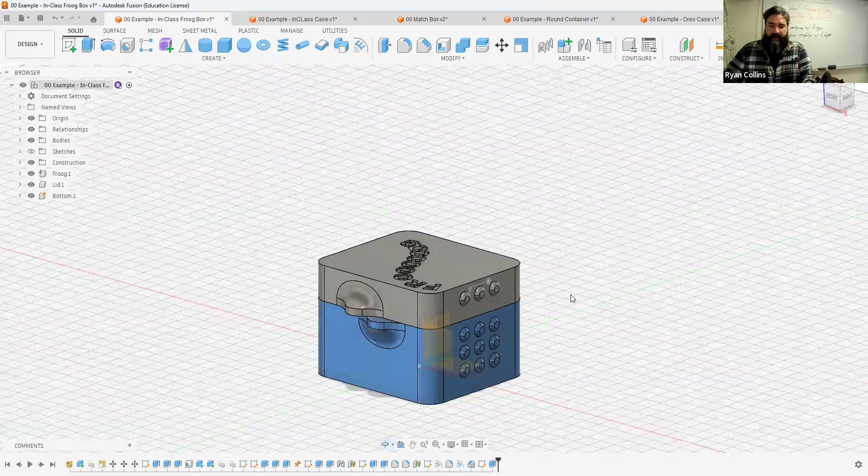All right, so we went over our simple container, something that has multiple components, which is now really explicit when we start a new project. As opposed to them just being single objects, these are different components because we can apply a joint tool to click and drag and open and close. This model was using an imported model.

We are going instead to make something that has a semblance of an Oreo, and it's a convenient little pocket case to hold two Oreos. Again, I'm just entertained by that. So let's actually get a start on something simple.

We're going to start a new design, and this is one of the new things Fusion has done. The default, or at least the first one, is part design. Part would be individual parts. An assembly would be importing all of those parts into one project and making them all interact somehow. We're going to skip right over that and use the hybrid design, which is the default layout for Fusion prior to this most recent update.

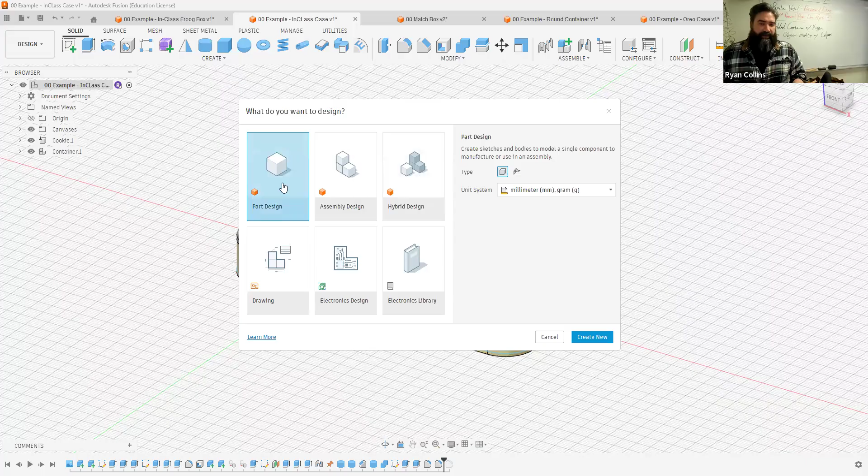So if you forget, it's not a big deal. I'll start a new project in the part design just to show you. If you need to change measurements, mouse over to the left on the project tree, mouse down to units. You would say units if you wanted to change from millimeters to inches or anything else like that. I don't, but just showing you.

But the new one is part design. Mouse over the word part design, and the little pencil symbol shows up. Left click on that. Toolbox pops up on the other side of the screen, and that allows you to select hybrid. Convert brings in a few extra tools to the toolbar that aren't on individual projects, like assemble, new components, stuff like that. And one of the main ones we're going to be using tonight is new component.

A component contains everything. So by default, say like any of the projects we've had so far, you will have your whole project. Let's say there's your project tree, and then until we say something, yeah, I had to remember how to spell untitled. It'd say that, and then below you'd have your bodies, sketches, whatever.

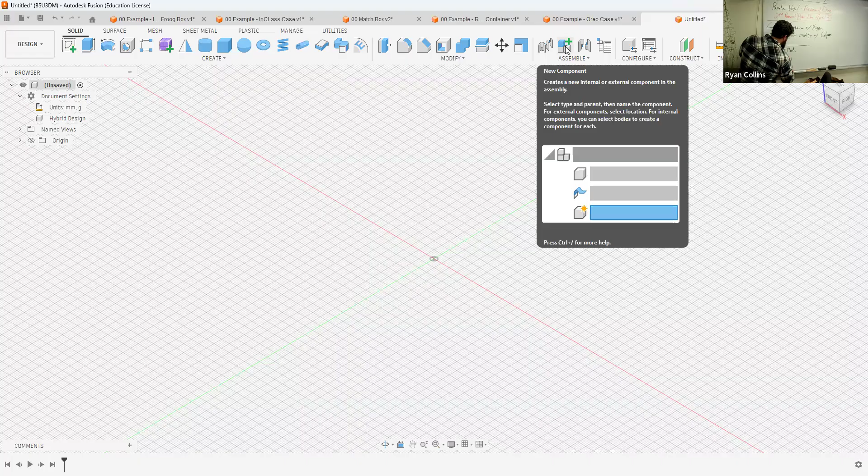If I add new components, a component can contain all of those. So each component can have its own bodies and sketches and so on. So you can have multiple components on a project, and it will help you organize. For the sake of tonight, it will also allow you to make stuff move.

So let's go ahead and start with that right now. We're going to default as, yep, leaving it there. We're going to build it here. What do we do first? Save. I put on 00 for mine to stay at the top. You put on your name.

And in class, I'll make a pencil box. You do whatever you want. Now, since this project requires at least you to actually have a semblance of your intended object for it to go inside, I'm personally going to start by making that object. So I'm going to start by making a pencil. Makes sense to me to start there.

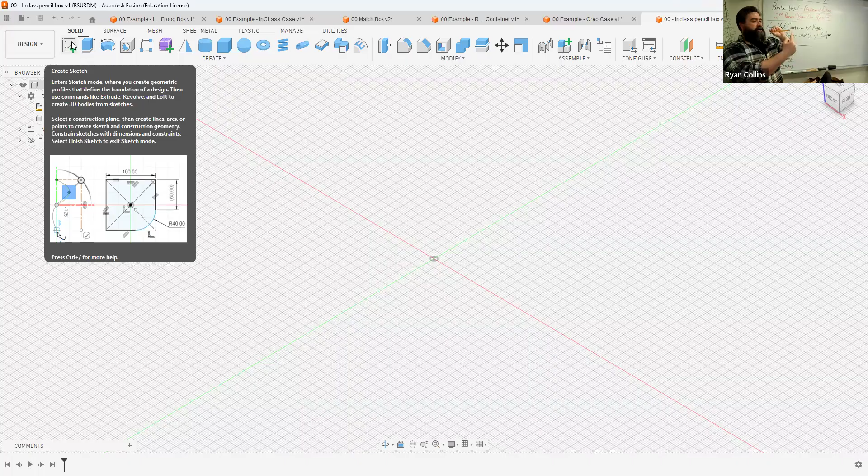I'm going to start with a sketch because with these pencils, I already know the simplest way, not looking at it from the side, but instead looking at it from the front. It's a hexagon. Easy peasy. So I'm going to start a sketch. Instead of on the XY plane where it'd be going straight up, I'm going to start it on the side so the pencil can lie down. So I'm going to start on the XZ.

And we haven't gone over this tool yet, but go to Create and Polygon. Easy way to make multi-sided circles. You have two options, circumscribed or inscribed. It's just based off of a circle, and then it puts sides onto it. No big deal there, whatever you want to use. In this case, it doesn't really matter one way or the other. Start out, and it just opens up just like a circle.

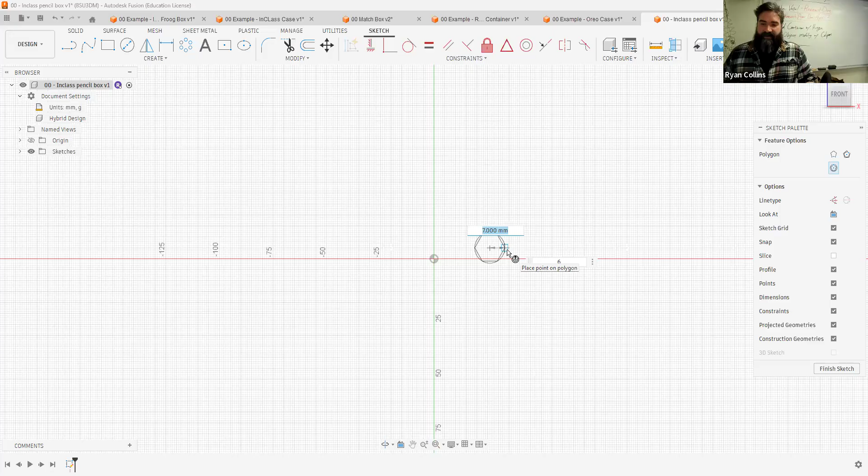I'm going to use my calipers that I was just showing y'all to measure just quickly. I should have switched over to millimeters. How big is that? That's about 7 millimeters side to side. Hey, that's pretty excellent, it was already at 7. All right, 7, and it's a 6-sided object.

Bam, all right, that's going to be my circle. That's pretty easy. I'm going to move that just so I can put it in a little bit easier spot to work with.

I'll put it right in the center. Close enough, that's all I need to do for this. Finish sketch, and I'm going to extrude that to be... well, I should have measured how long this is, but that's about 160 or so millimeters.

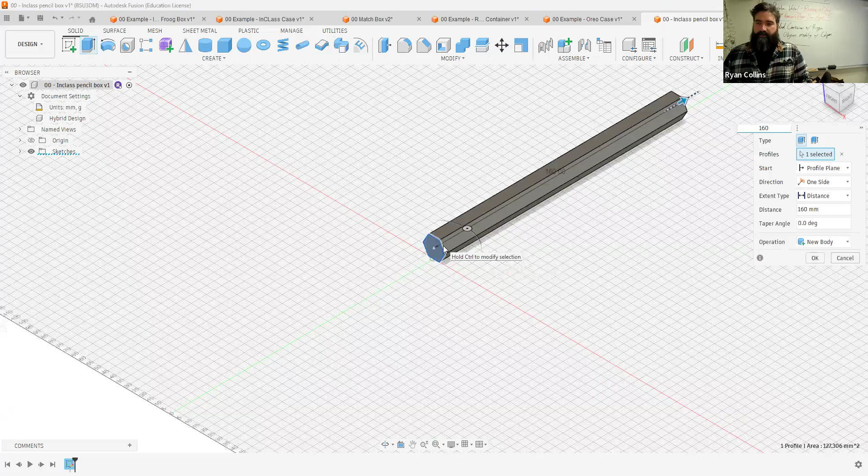There we go. What's that, seven? Would you want an eight? What, the case?

Oh yeah, I'm just making a semblance. That's okay, and then just for simplicity's sake I'm just going to add a cylinder.

I can draw on the surface there. If you mouse close to the center you'll see it change, hopefully, to about the center. We're just making this close enough, close enough. And we'll just say, I don't know, that's about almost 20. I'll add details to it later.

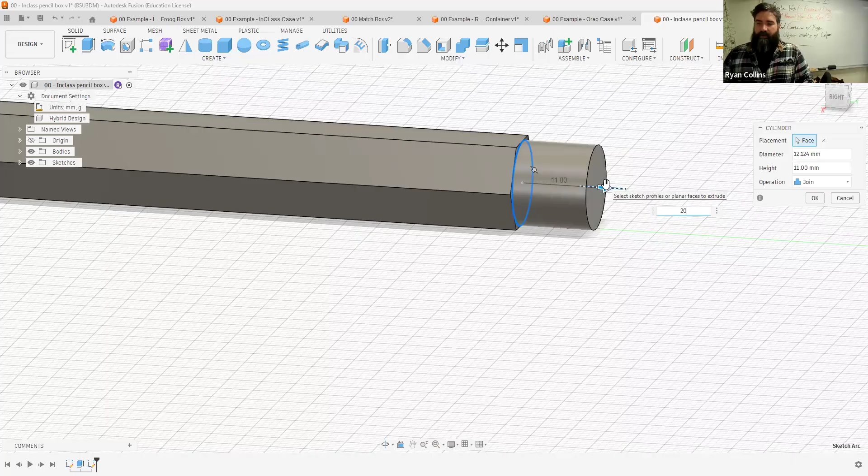I could even throw on, if I really feel like it, maybe even a fillet over here, and I'll see how far I can push that. Not a great idea, that doesn't work whatsoever, unless I'm making a tiny Zeppelin.

All right, so I'll leave it as an untrimmed pencil. That'll be close enough. Now, I do still want to add the ferrule, little details like that. I'll make it yellow, doesn't matter. But right now I just wanted to show you a quick semblance.

All right, pencil. Now with this I can do this separately, or I could have done it before. I just want to show you all that you can still do this afterwards. So I have that body, pencil.

I'm going to go up to where it says Assemble and says New Component. Or if I drop down, don't insert component, just new component. And with that body, I'm going to click OK. And now that creates, you can see this little symbol. It started a new one over here, labeled pencil, and it contains now that pencil body.

So that is already separate. But I want you to be aware, pay attention to what happens when I started that. You can activate different components of your project and you can work and build inside of that. But it's easy to accidentally start getting things mixed up if you forget whether you have or have not activated a component. So if you look, if I mouse down here, you can see this little circle with a dot on it.

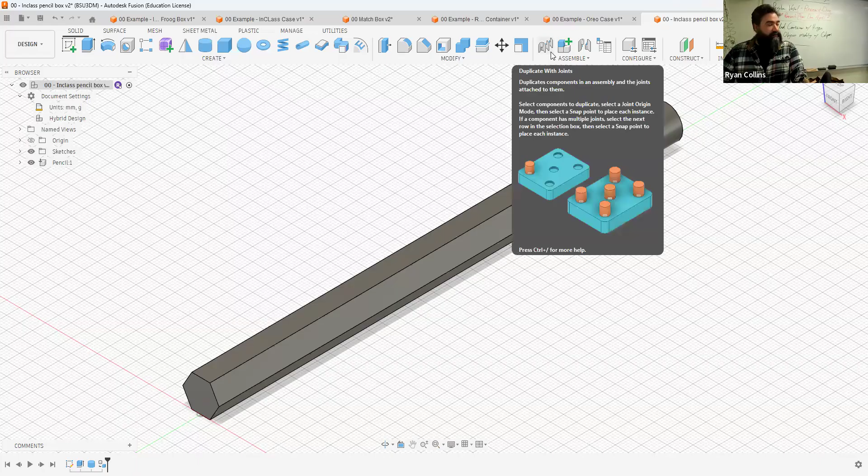Doesn't matter right now because I haven't made anything else, but that's going to be the easiest way to get lost or keep things organized. So with that in mind, I'm going to start a new component that doesn't have anything in it. Doesn't matter which way you go, but a good habit to get into as you start with this stuff is create your components before. So I'm going to start a new component.

See, it's highlighting that, but it's not actually going to do anything. So with this I'm going to say, well, let's change it to pencil box. Now that automatically started, I shouldn't have done that. I meant to click the... let me Control Z and show you again.

New component. Well, now I can't spell.

Before I hit OK, if I mouse down where it says Activate and uncheck this checkbox, now when I hit OK, it creates the component but it does not automatically activate it.

That's good for when you are just laying things out, or you're just wanting to create a new component, because you can still also drag and drop things. So if I started something and forgot, oh, I meant to add this to a component, or I'm going to organize afterwards, I could actually move these pencils. So like the pencil object, I can drag it where it says the pencil component, pencil box, and it now is in the pencil box component.

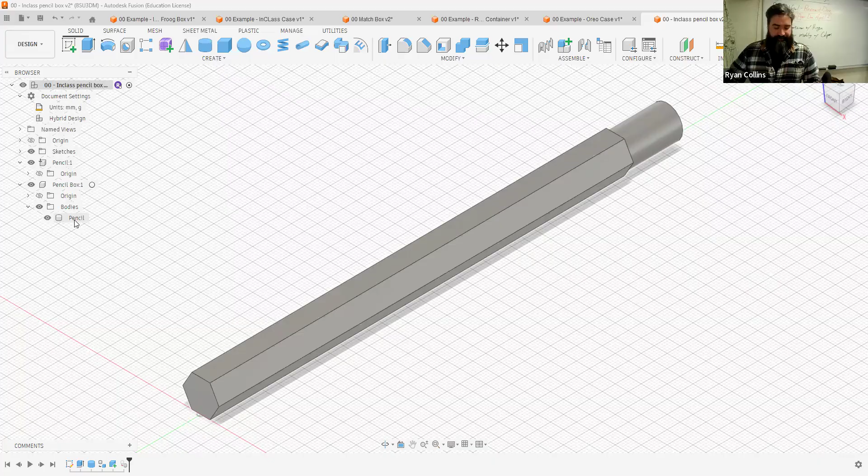I don't want that, but just know that if you forget, you can drag and drop. You can move your objects, be that sketches, bodies, whatever, between components. So I'm going to Control Z that because I don't want that there. But now I do want to work on the pencil box component.

So I'm going to mouse down. I'm going to activate the pencil box component that I just started, and you'll see that object that I just made, the pencil, kind of ghost out.

That's okay, it's showing you a reference, and I can still interact with that if need be. So if I wanted to draw on that surface or something like that, you can.

But this lets you just have a reference, and you can focus on what you're building now. So what I'm going to build is a pencil box based on the size of that pencil. I'm going to start with a sketch on the XY plane, like I'm looking straight down. And that is obnoxious, I'm going to rotate it.

I'm just going to draw like a box around that, whatever seems right. In this case, I usually like to work right from the center, and so I should have moved this pencil over, but if you forget, it's not a big deal.

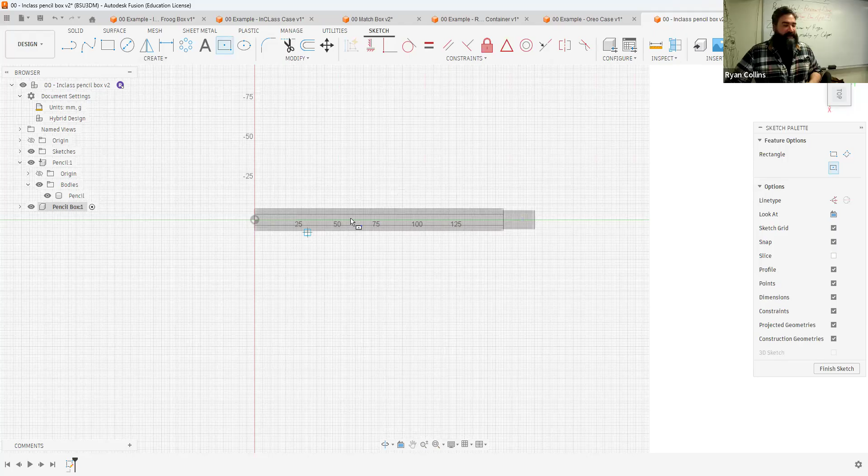Other thing is, if I do want to build it based off of this pencil, remember we talked before, I can project, I can copy the outline of this. So I press P on my keyboard or go to create and go to project, same thing. And on my toolbox, I'm going to select bodies because I want just the outline of the whole thing.

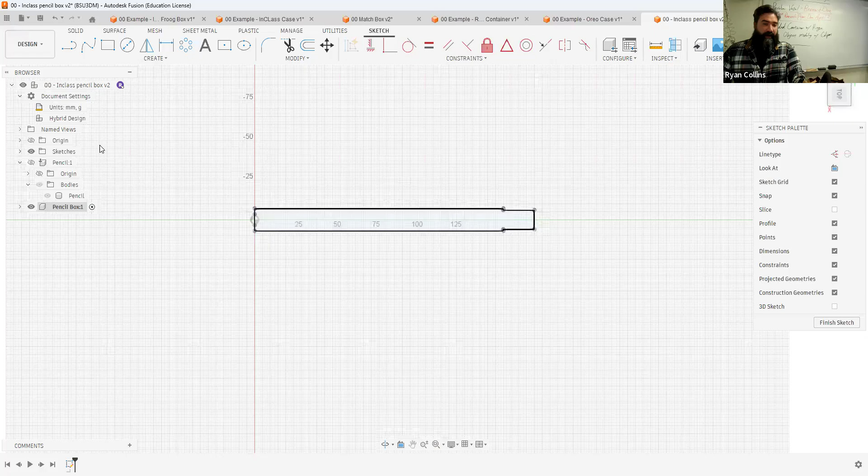The reason I did that is now if I need to hide the other component, I don't have the actual object to interact with or mess up my current project, but I now have a nice outline to work from. And this works great because now I can use a center rectangle and kind of build it right in there.

So to measure, let me start a line. I'll go from one side to the other, right in the middle, and draw it all the way to the end. And I'm going to turn that into a construction line.

So I'll highlight the line and either go over here to construct or just press X because I just want that as a reference point. That's it. Now I can use my center point rectangle, measure out. When I get to the center, it turns to a triangle. Let's build it, I don't know, somewhere that size-ish.

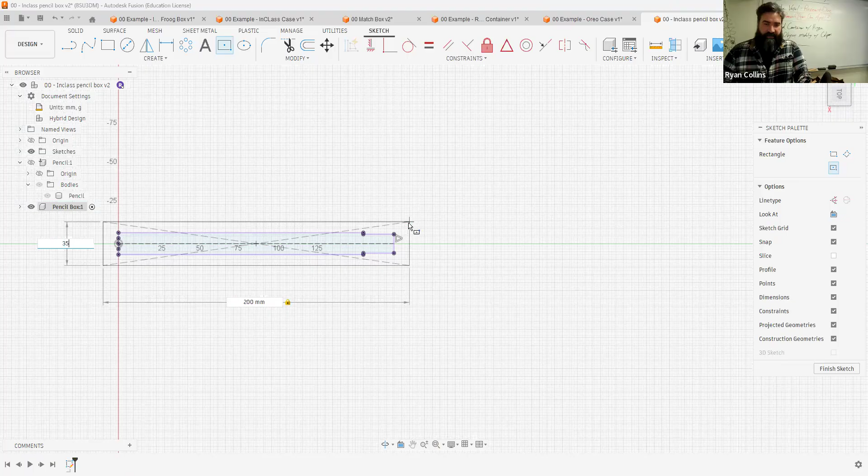Let's make it a little bit more even because even numbers are less bothersome. 200 millimeters by, I don't know, 28. We can make this much larger if we plan to make more of them. So let's say 35, maybe 40. If I planned on making more pencils, so it holds more than a single pencil, there you go. But we're getting the idea.

Cool, there we go. And honestly, that can work. That's it, we're done, finish sketch. Because I just need a simple box in this case.

And from here, now I have my pencil box project component. I'm going to extrude. Make sure you get both of them, or if you need to hide that part of the sketch, whatever. Let's unhide the pencil itself so I make sure I'm making it big enough.

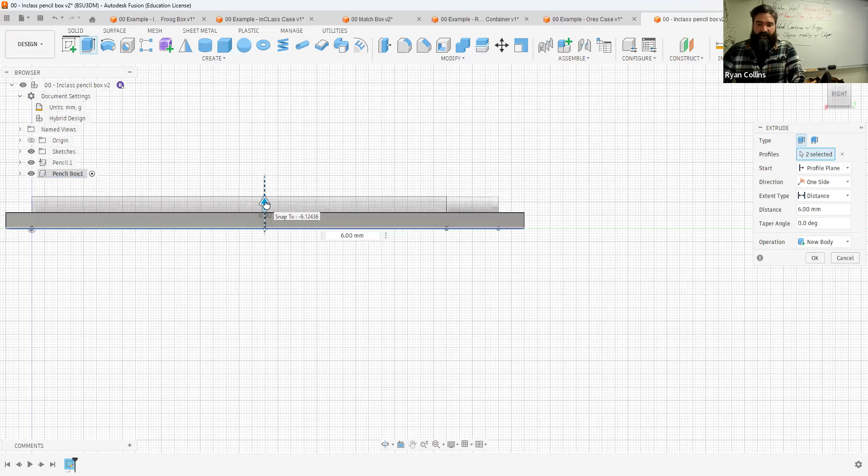Let's extrude up. We should probably make it a little bit larger, so let's say 8 instead. I think I'm going to make both sides 8 millimeters. All right, that's a simple extrusion.

New body. Cool. Now, one of the good things is... make sure that didn't accidentally... all right, the colors are just really similar. That's irritating, I want to make sure that those two didn't join together.

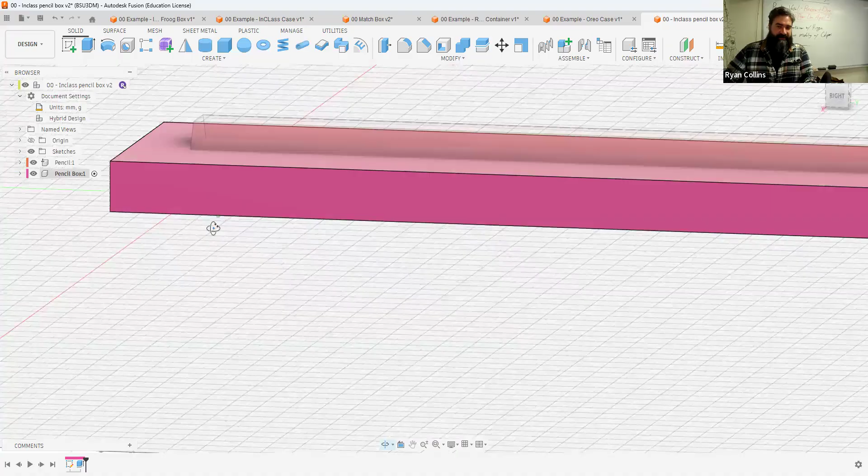So I'm pressing and holding shift and pressing the letter N on my keyboard, and it automatically assigns a color. You can see on the project tree, the pencil box default color is like this, more pink, and the pencil is more orange, but they're real close together, so that's a bit irritating. But there we go, so I have the start of a simple thing.

And what I'm going to do is another one of those. I want to make the lid. So whether or not I start from the sketch or right on top, because it's just a simple square, extrude, same thing, let's go up 8.

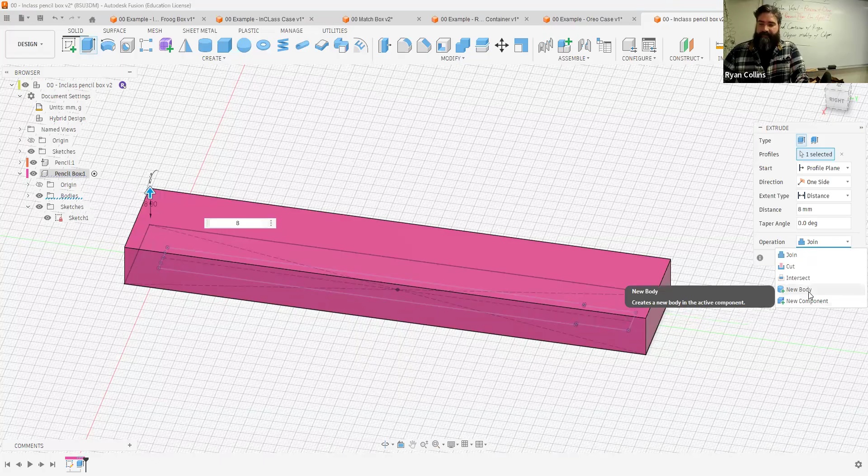But make sure on the toolbox where it says operation, I don't want to join, I want a new body. You can even throw it into a new component right here, but I'll do that afterwards. So new body. Okay, so now I have what's going to be a top and bottom, but those are solid objects. I'm going to hide the pencil for now, and let's go ahead and label these.

Bottom and lid. Easy to keep things separate.

So let's go ahead and throw those into their own components now. With the pencil box project component active, I'm going to create a new component. I'll show you two different ways since you could do it either way. If I select the lid body and then go to new component, it throws that into its own component, already labeled lid.

If I forget and just create a new component, and I want that to be the bottom... forgot, oh crap, the bottom's still in the other component. I can drag and drop that bottom into the bottom component. Now you see it's coloring everything differently.

So it doesn't matter which way you go. I'm going to save. I know this sounds like a very roundabout way of making two boxes or two rectangles, but these are the steps you're going to need.

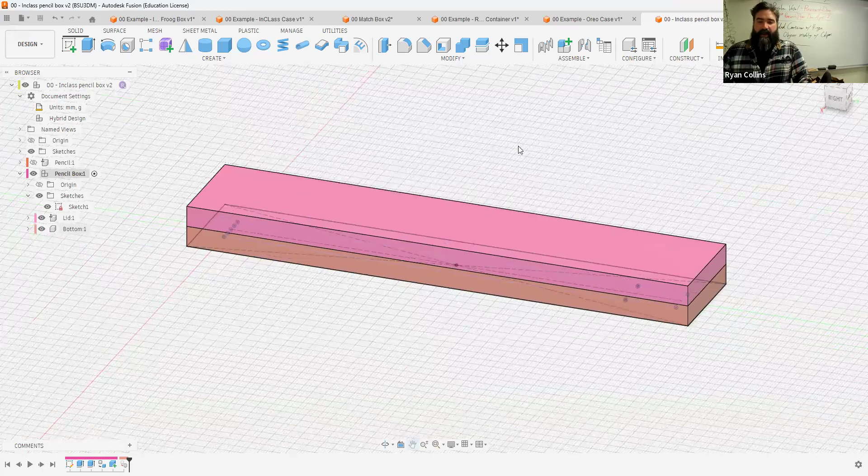All right, so we have our two components. We have our two sides, kind of - those are just bricks. Let me hide the lid. I want to hollow this out, obviously.

The easiest way to hollow this stuff out is one of the tools under Modify - shell. And it does exactly that: takes your solid object and makes it hollow inside.

If I press shell, and this is the bottom, you start with whatever face you select first, and that's what it will open up entirely. Let's say I want this to be a 2mm thick wall. Press 2, and you can see it automatically hollows out the whole thing with a 2mm wall.

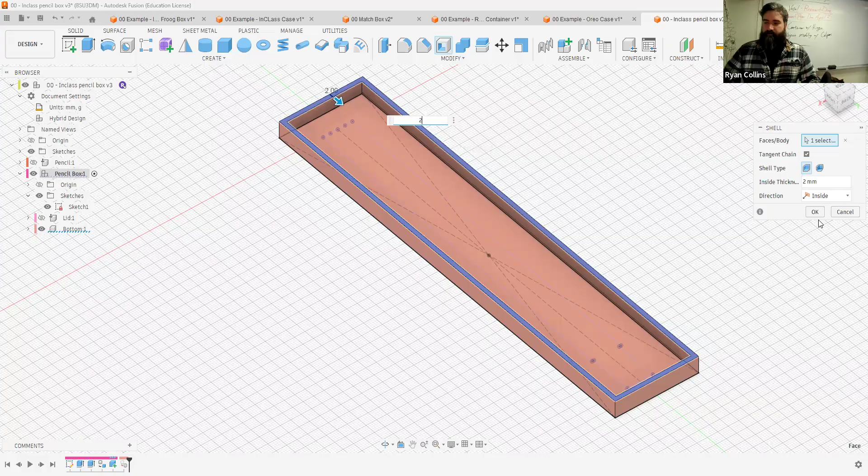This works on almost anything. I say almost because too complex of an object and it won't work very well. But the cool thing about shell is what if I wanted this to be kind of rounded? Let's move my history slider before the shell tool was applied.

Let's say on the bottom I had wanted to put a fillet - I'll put like a 1mm fillet around the whole bottom. Let's make it 2, a little bigger. Let me hide the sketch, and you can see I've got a curved bottom there. Now when I go forward and apply the shell...

Well, it's too thick. Let's make that more significant, like a 5mm. The shell automatically calculates because the shell is like an offset tool.

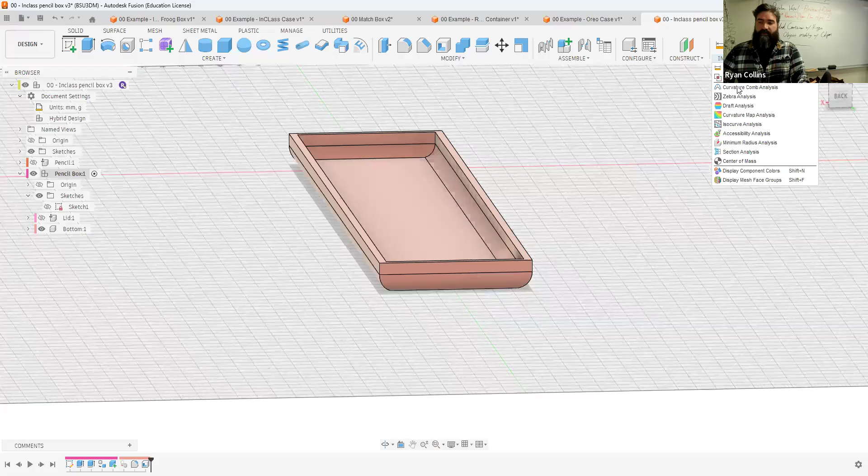Just so you can see what I'm doing, I'm going to apply one of those section analyses I told you about, using the inspect tools. I don't expect you to keep all this in mind. I'm just going to drag this forward - you can see a cross section now.

If I had not applied that fillet, let me suppress this for a moment - it would just be square. But because I put a fillet on beforehand, the shell took that offset and automatically applied it. You could, of course, add a fillet to the outside and inside separately later if you wanted, but this just shows that shell will work on most anything. If it's too complex it'll give you errors, but it's a pretty cool tool.

All right, so let me turn off that analysis. Great, I got that. Let's do the same for the lid.

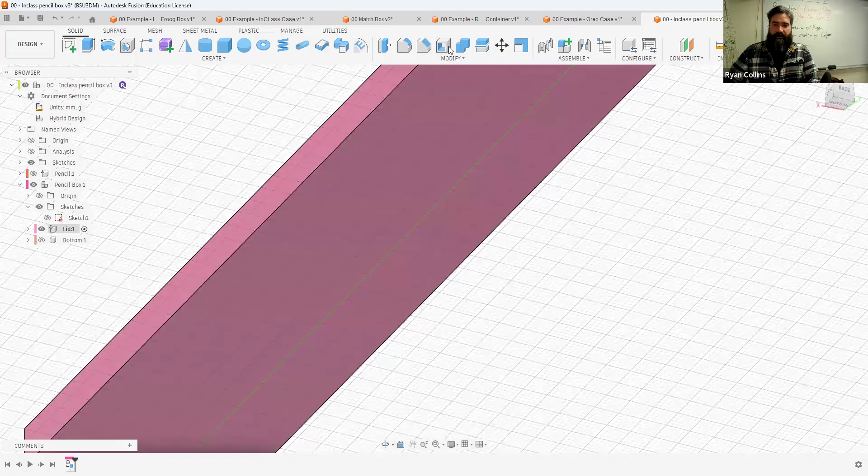So I'm going to activate the bottom component, and you can see this also organizes all of my tools - bottom has that shell applied. If I activate the lid component, it's just when I drop that in. Let me hide the bottom component and apply the shell - 2mm wall thickness. Bam.

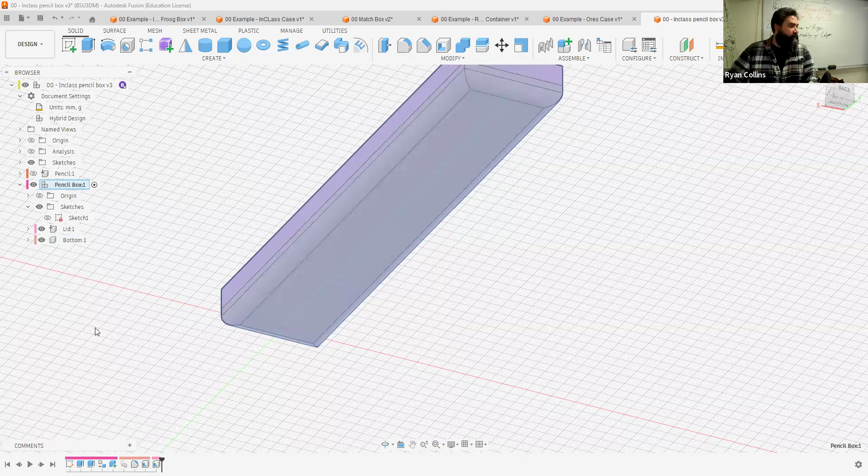So it's showing the tools here when I drag and drop the object in and apply the shell. If I activate the bottom, it's the fillet and the shell. If I activate the whole pencil box, it shows me a breakdown of what's applied to the pencil box, the lid, and the bottom, or both, because it works like that. Pretty great - it just helps keep you organized.

And it looks like I'm starting to make a Neapolitan ice cream bar. Anyway, might be getting hungry.

Anyhow, we have a hollow box now. I'll unhide the pencil inside. If I hide the lid for a minute, great - that is really frustrating that the colors are so close, but it is different. It's just automatically applied really close colors.

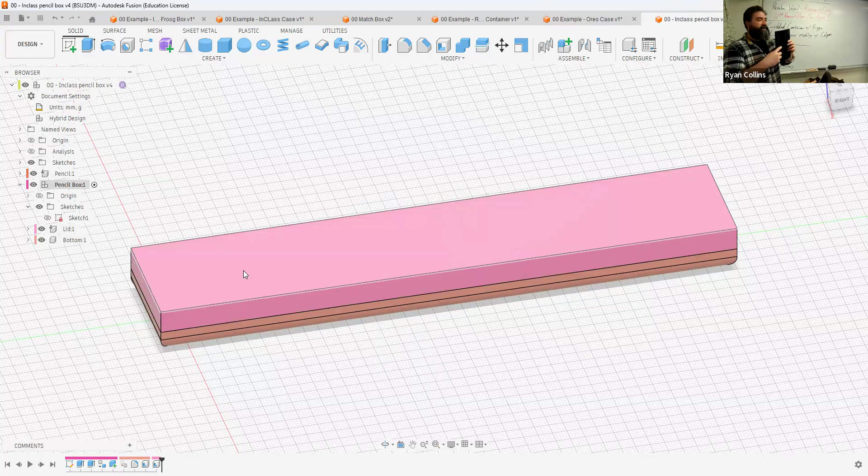Shell piece. So now got that applied. If I had made details, like ridges and things on this project case here, before I applied the shell, it would actually have those ridges show up on the inside as well. It's a really effective tool.

All right, great. Got my pencil box, but it's just a box. Let's add a hinge to it. I'm going to show you two different types of hinges, or two different ways of making the hinge. The first type is basically like a barrel hinge, if you've opened a door and looked at the hinge, that's what it is.

Essentially, it's a circle with a hole in the center that you would drop some kind of a pin or something through. So what I'm going to do is... well, this is the problem with making a project that's not smack in the middle, but we'll deal with it.

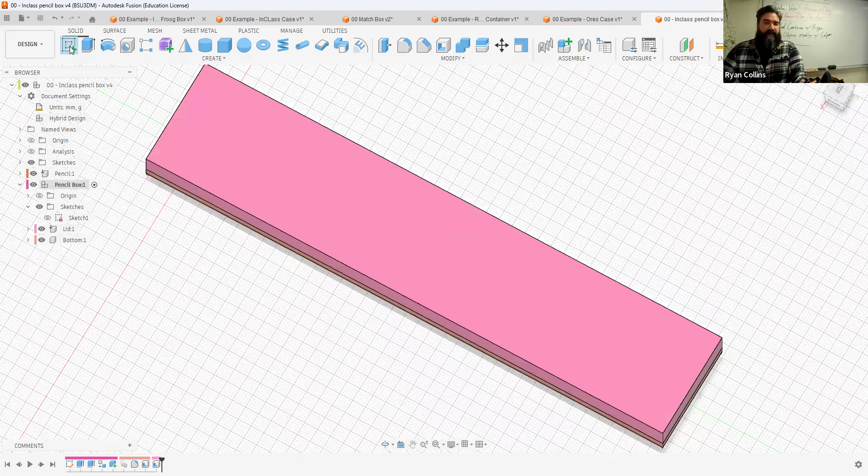So what I'm going to do is create a sketch, and activate the whole project tree, or at least the pencil box. I don't need anything outside of it, but not the lid or the bottom, because this will apply to both. So I have pencil box applied, create a sketch, and I want this on the XZ plane. If I can't quite get to it, don't forget you can always just hide that. There we are. Doesn't matter if I'm looking at it from the front or the back, same effect. You pick which side you want to work from.

If it's going to be on the top or the front or the back, right now that's irrelevant. I'm going to use project again because I want to copy the outside of this - copy the top, copy the bottom. The reason for that is now when I hide those, I have my outline, which makes things easier.

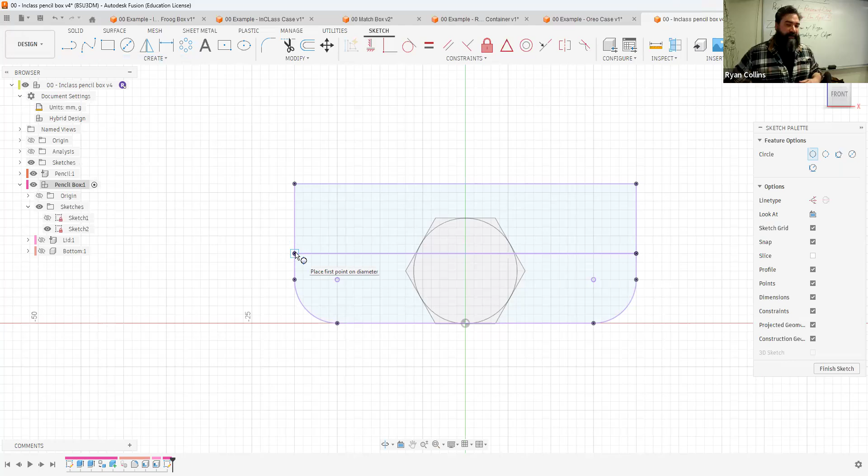A barrel hinge is just a simple circle hinge with some nubs on the end. So I'm going to start with a circle, but go to create, circle, and instead of center or anything, I want a 2-point circle in this case. I can put one point smack in the middle where the top and bottom meet, and the other one somewhere out here.

Now, this requires a little bit of foreknowledge in so much as, how big do I want that hole to be? I want to make sure there would be enough material around that to work. So in this case, if we were using a little pin or something, decide on how big the pin is.

What I'm actually going to show you is how to use a length of filament rod as your pin and just feed that down the hole, gluing it on either end. You could also use a bit of wire, some metal rod, an actual screw or bolt and nut - whatever you're going to use, keep that in mind.

But in this case, I want to show you all how we'll print this and demonstrate later - I'm going to use a length of filament to feed through there. That filament is 1.75 millimeters in diameter, so I need to make it at least that big, with a little bit of meat around it so it wouldn't collapse.

So let's say 4 millimeters. That seems excessive, but I'm showing you for demonstration. All right, that's it - that's going to be my circle.

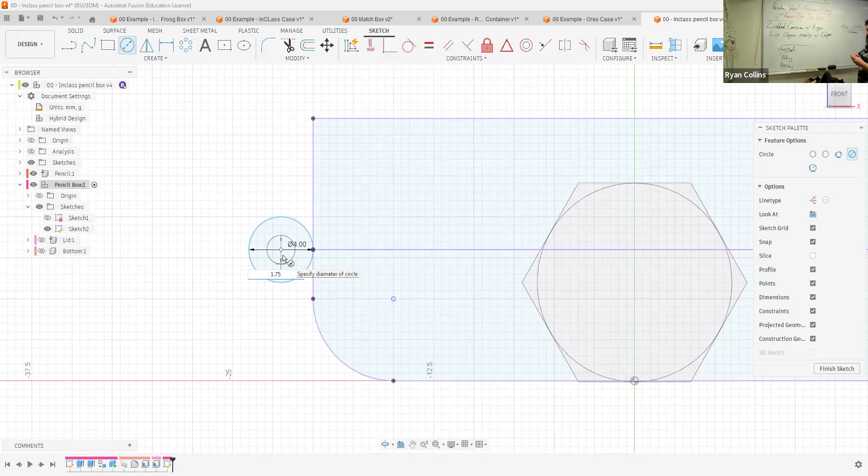Now I can create a center point circle that is 1.75 millimeters, but we want a little bit of space. A general rule for clearance is anywhere between 0.1 and 0.15 millimeter, so give yourself a little extra space. If the actual diameter of that filament is 1.75, I should bump this up to more like 1.85 or 1.9 just to make sure I have enough space. So let's say 1.85.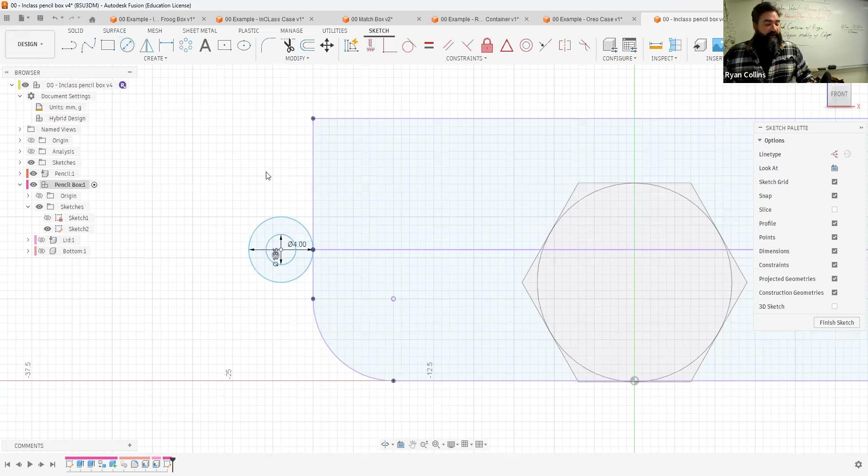A little bit bigger, that's all. And the other part is, if you looked at a hinge, if you looked at any of the examples we've messed with, it needs some sort of a little tab. So you've got the circle and some sort of a tab. This allows the hinge, the circle, to actually attach to the thing.

But if we use like an angled bit like this, remember we talked about when it comes to printing things, overhangs and underhangs. If you have a circle on the side and your model starts printing...

Oh, that's a Sharpie. Also a Sharpie. They're all Sharpies.

Layer, layer, layer, layer - that creates an overhang. But we have that tab for it, so it won't need supports to print. So that's what we're going to do.

All I'm going to do is literally draw a couple lines. I'll take a line tool somewhere on top - you can go all the way to the top, somewhere toward the top. And somewhere on the bottom, it could be right there or even further down, totally up to you. One quick thing, we can also make these even by using the constraint tangent.

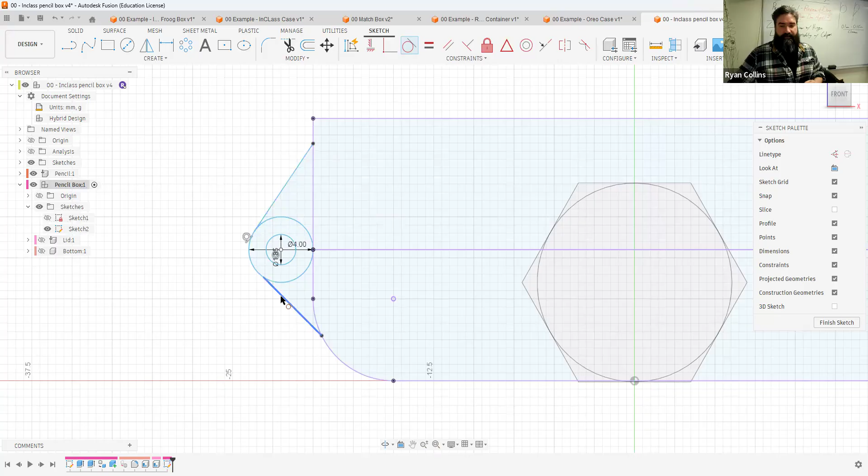The tangent tool - if I turn that on, select a line, what do I want to create a tangent with? The second thing you select is what it will be tangent to on a circle. So it kept the original point where it connects to the box, but it just moved so that line is now tangent on that circle. You don't have to do that, it just cleans up your model.

That's it, these are automatically closed sketches. You can mouse over and see that little wedge creates a little ice cream cone or triangle shape there - those are closed sketches. We're good, so that's literally it: 2 circles and 2 lines.

Now, I told you this kind of messed up my project. Let me unhide these, because I didn't make my project smack in the middle - I should have used the origin as the center point for my project. It's not a big deal, it's just a mild pain.

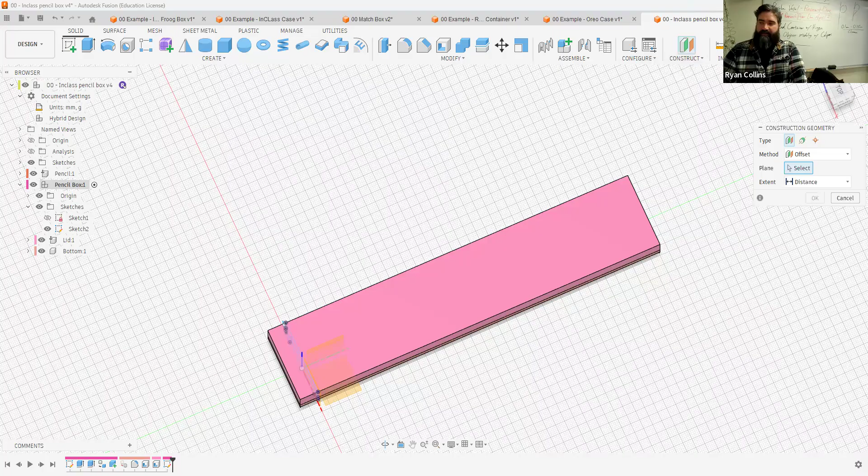If you want, we can always take a measurement of how long that line is - 200, okay. So let's make a construction plane, an offset plane. We did this before, when you were making your emboss.

And I know it's not actually at 100, but if you do that, now you can sketch more or less right in the center. So it's not that big a deal, it just makes it a little bit more of a pain.

The reason for that is we activated the pencil box, the whole project. This sketch is sitting out here, which is going to be my hinge. I'm going to extrude a couple of extrusions, but the cool thing is if I activate whatever component I want it to be on, it will automatically appear on that. So it doesn't matter if the long part is on the bottom or the top, it's really up to you. The default is to make the long part on the bottom and the two side ones on the top - it's your model, do whatever you want, but I'll keep to the regular.

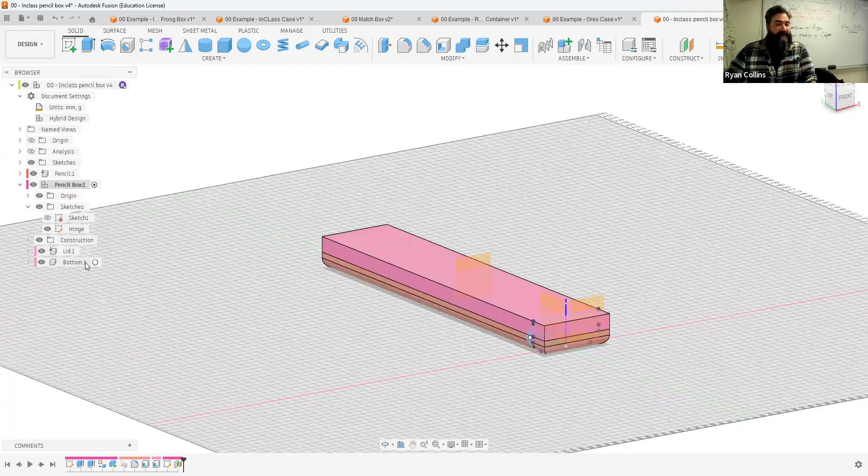So what I'm going to do is extrude this, but first I'm going to activate the bottom component - so it highlights there. Extrude - I need the circle, I don't need the inside, I need the bottom tab. So I'm going to click and drag, or just add this - let's say, I don't know, let's make it 50. It's automatically going to connect to there.

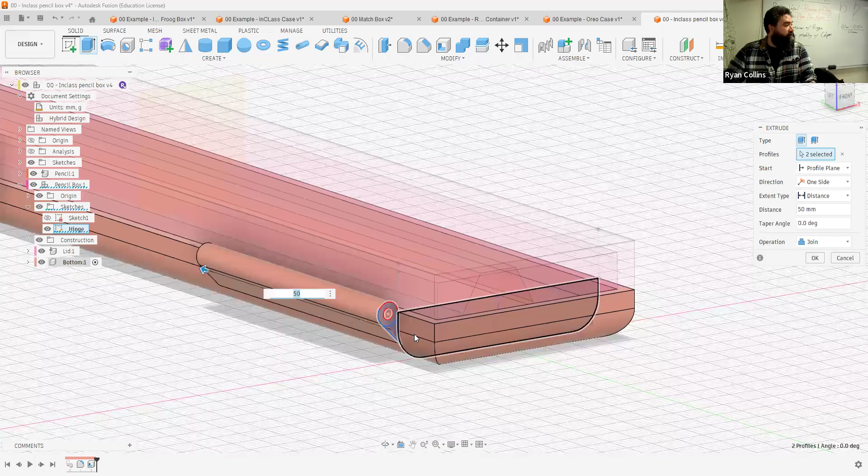Of course, I kind of buggered up everything when I didn't make this smack in the middle. So instead, on the toolbar, instead of the default being the profile plane, which is where you originally made your sketch, I'm going to select object and that construction plane I just made. So now it's going to start over there, but it's going to go in one single direction. Instead, I'm going to change the tool setting to symmetric - now it's going 50 millimeters in either direction.

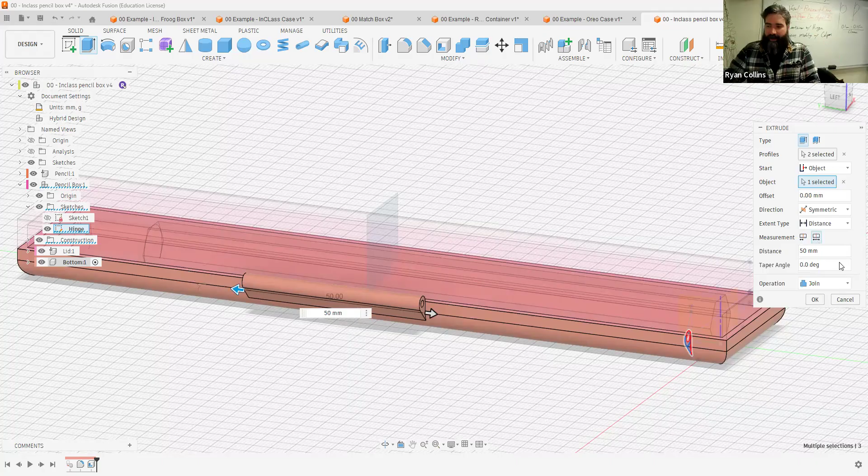I don't want that, so another option - you can see the little symbols that popped up with the red line going in either direction. It's either half length or whole length, meaning if I switch it to whole, it's 50 millimeters on the whole. I know that's way too many steps, but that's just because I messed up before, so you kind of have to work your way back. And it's going to operation join - that is automatically joined to the bottom. Now, of course, it hid that sketch, which is obnoxious, but the next steps won't be nearly as convoluted.

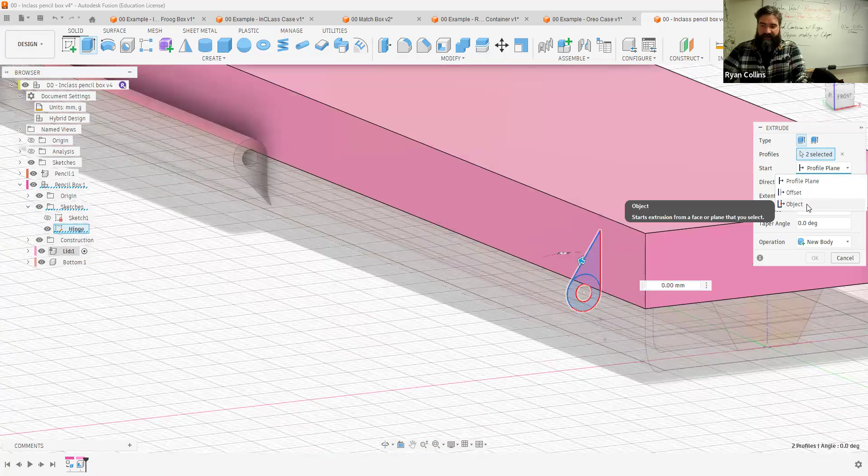Next, I'm going to select and activate the lid component, so the bottom one kind of ghosts out and the top one becomes more clear. Same as before, I'll extrude, mouse into that sketch, and select the outside and the top one. Instead of profile plane like before, I'll start with object, and this time select the face of the bottom. Now just type it in or drag it - let's say 15. Because I have the lid component active, it's automatically joining and becoming part of the top.

Let's do that one more time for the other side. Extrude, start with object, I'm going to orbit around, select that little face, and do the same thing. What did I make that, 15? Cool, there you go.

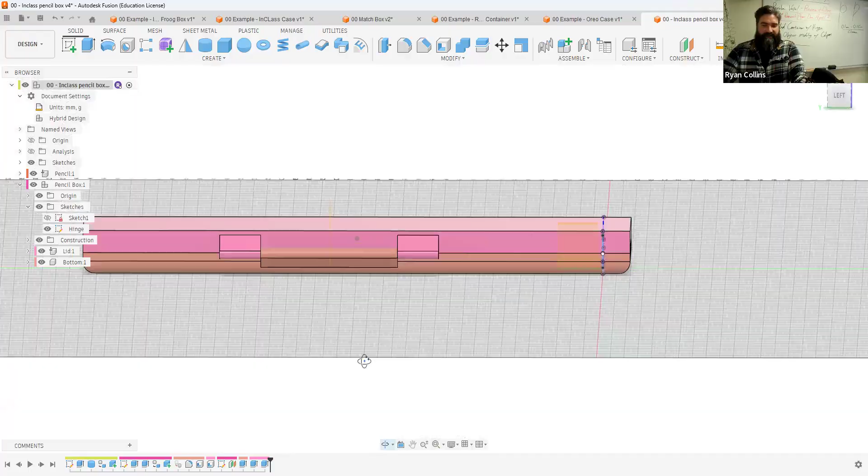So I'm going to now activate the whole thing, or actually I could activate the entire project. Now I have a case that has - well, I kind of messed that up because I didn't make it right in the middle, but I can always go back and change that, so whatever. But I have my parts, top and bottom. So I'm going to save there and check on everybody.

Hinge modeled. Okay, so we made our lid, we made our base, we have our pencil adjacent shape inside. Alright, let's make the actual hinge, or the joint rather.

So I don't actually need a pin inside. I just need to have the model basically modeled to where it looks like it would work, as in I couldn't make the joint function without this hinge modeled.

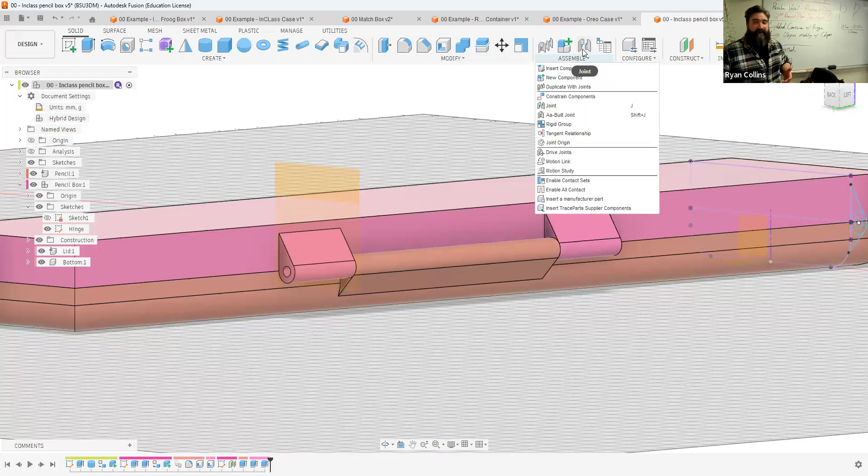So when I mouse over, what this will be is a symbol. If I mouse over, what we're going to is joint, which is one of the default tools showing up above. It looks like a door hinge. So you get where we're going with this.

A joint allows you to create some sort of relationship, as in they can move, they can revolve. You can even put what's called a rigid joint, where it just glues them together, like two parts - say you're making a case that you would then be gluing together, and you can apply a rigid joint. It would still show the relationship, still show different parts, but it would just demonstrate it as kind of being joined together. Or like in this case, it's showing some kind of a pin inside, whatever. You can show - there are multiple tabs on it.

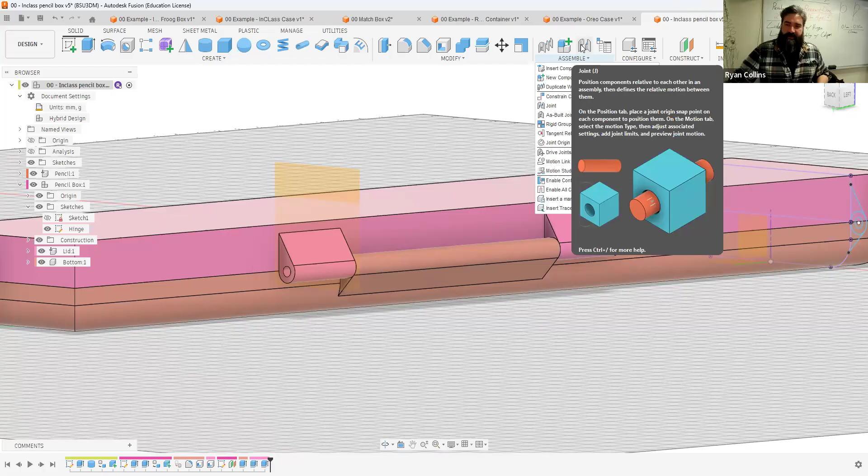So let's go ahead and activate the joint tool and work from there. One second.

Okay, so I activate the joint tool, and what this does is you have to make two different selections. One is the thing that will move, one is the thing that it will move in relation to. So what we're going to do is, you can see as I mouse over surfaces, it's trying to snap where my cursor is - that little gimbal-looking thing with green, red, and blue lines on it, which relate to the axes. You can see all these points and things - these are all places you could select, but we want it to be in relation to this tube we just made. Now you can make it appear smack in the middle of the whole thing, or it could be right up on one of the two sides of the joint where there would be like a sliding surface.

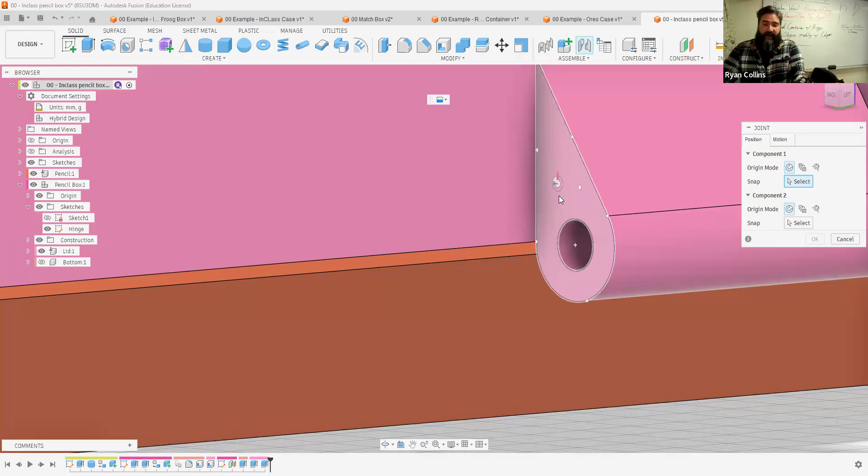That's close enough. So what we want to move will be the lid - that's what we'll move. So if it helps, just hide the bottom for now, and I want it to appear right on that plus sign. Now the snaps have gotten significantly better on this. As I mouse over this face, you see the face highlights on the inside of the hinge - I'm not outside, I hid the base, so I'm selecting on the inside. And as I mouse over that open cylinder, I can usually get it to snap there.

If you have trouble getting it to snap there, what you can do is mouse over the shared face, press and hold Control on your keyboard, and now it locks your selection to only things on that face, and it makes it easier to snap to that floating spot on the hollow cylinder.

Now see how the lid kind of ghosted out? Now I'm going to unhide the bottom, and I'm going to end up selecting the exact same spot. So if it helps, hide the lid. I need that spot again, but since it's already selected, it doesn't want to let me select there. So this is where I press and hold Control while I'm mousing over that face. Now it'll let me snap right there. Unhide the lid. Cool. All right.

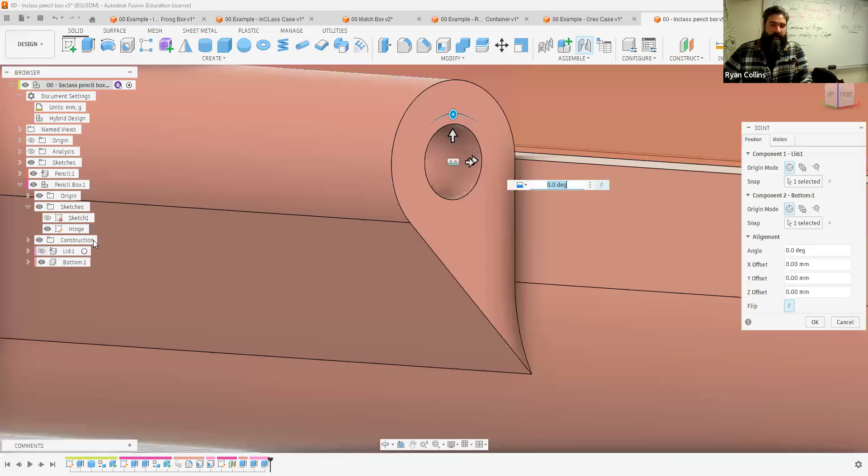Now on this, there are two tabs. There's the position of the joint itself, and then the motion joint. So let's go over here. The default one is rigid, and you can animate them.

Try it out. Rigid just gives you anxiety. It's showing it's like they're glued together. Oh my God, stop that. Yeah, that is giving me... yeah, exactly, I don't pull that out of nowhere.

What I want is the next one down, revolute. And if you selected it correctly, like the lid first and then the bottom, it will animate exactly that. Preview it. Now, obviously, it's going to clip through itself right now because we put no constraints or anything on it. But there we go. That's really what I wanted to do. I just wanted to rotate it like that.

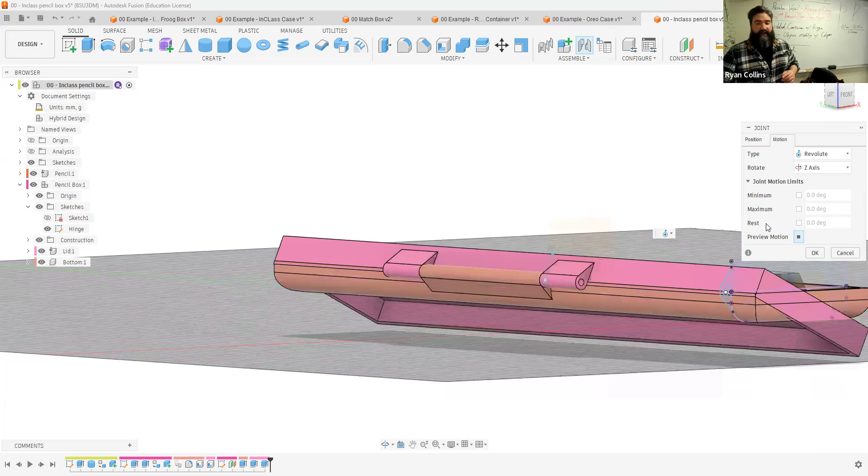Hit OK. And now you can see, let me collapse this stuff. Under the pencil box component, there is a relationships folder now, and that's where the joint is. So now I can adjust. Oh right, now it's a folder for the joint. Oh my God, they keep changing things.

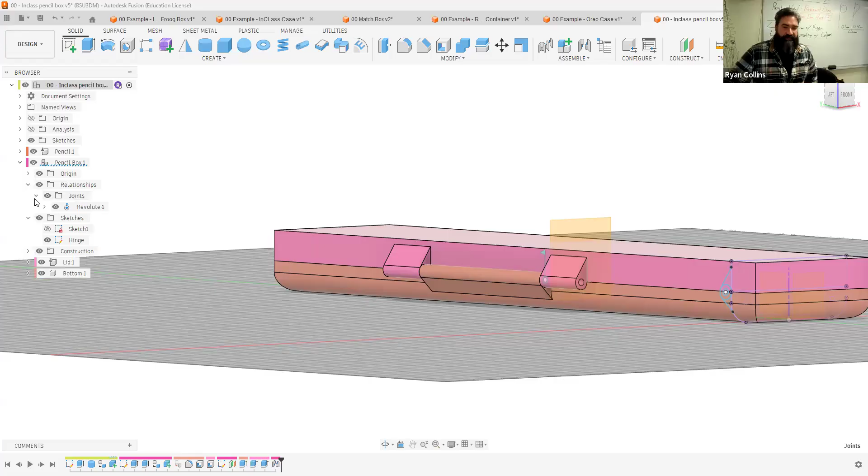So now I want to adjust this. But right now, if you try to click and drag, that's not what I wanted at all. So there's two steps. I need to make adjustments to that joint so it only opens and closes so far. But I need it to not float away when I click and drag. So first step is I need to lock one of those in position.

So I'm going to lock the bottom in. As I mouse over the component that I've labeled bottom, right click on it, and at the very top, we're going to say pin. It's the second one down. It literally pins that bottom into virtual space. So now I should be able to click and drag, and it will open and close. It'll still clip through itself, but it will stay put.

Now, one thing might pop up. This happens sometimes. You see on the lid component, I didn't do anything to that, but see the little anchor symbol? Sometimes that grounds things, it locks it in place. If you're having trouble, right click and then just unground from parent. It's no longer grounded, it's free to move. Sometimes that becomes an issue. So if you do all these steps and it still is not doing anything, check that, make sure that it's not grounded to parent. That's all.

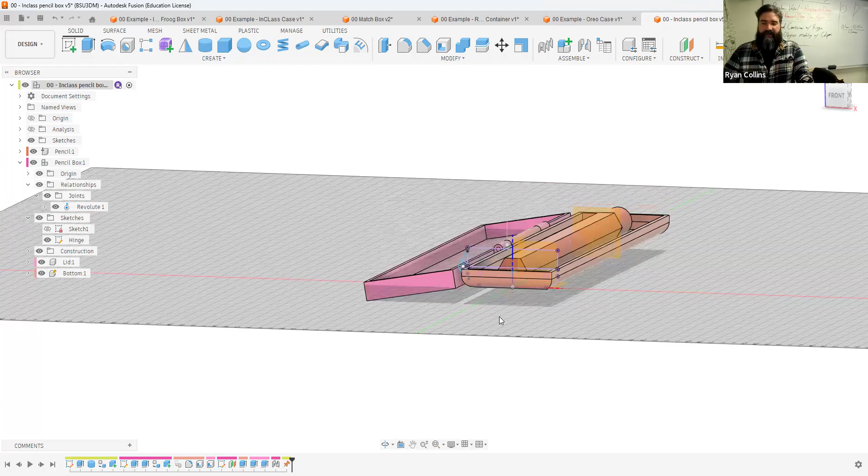Now I can click and drag the lid, but it still clips. And just so you know, when I do that - not the sound effect, but look at the upper right hand corner - this new tool pops up whenever I do that. It's asking if I want to capture what's called capture position. It's asking if I want to keep that locked in that place.

So again, this would be like if I was making a robot arm and I got everything built together and it's all connected and all the joints are working. I wanted to position it and then leave it in that position - I would capture that position. That's why, rather than going back to default and however it's putting it back, if I don't, either Control or Command Z and then just hit revert position and it snaps back to the original.

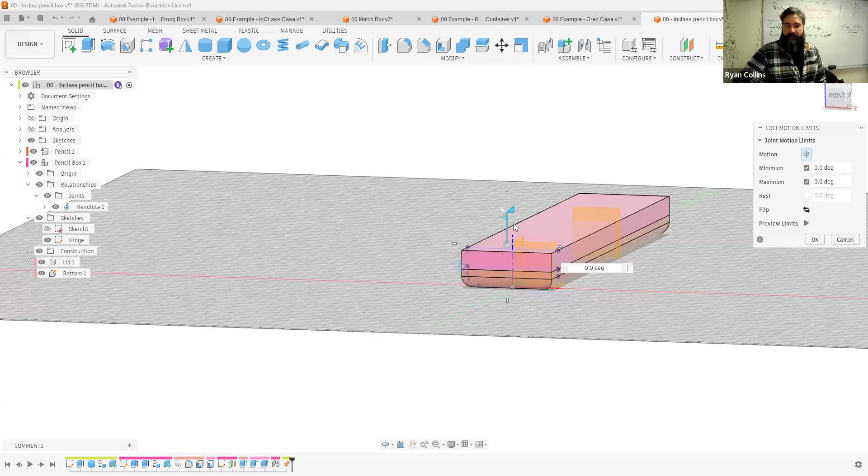That's it. So I want to adjust that joint. So I'm going to open the relationships folder, open the joints folder, and when I mouse over what's called revolute, that little orange arrow, left click that, brings up a toolbox. I'm just going to check these minimum and maximum, and let's just put like 180 in there. Or you can drag it by these little arrows - something like that, doesn't have to be 180. There we go. And now if I press the little animate button, now it'll only open and close that far.

So that's it. That's really all we're gonna do for that. Now we're gonna make the pins and all that stuff later, but really want to just get started with that.

So the idea there would be I would make a pin that goes into there, like in this case, has a facsimile of the filament. I'm just gonna make a cylinder.

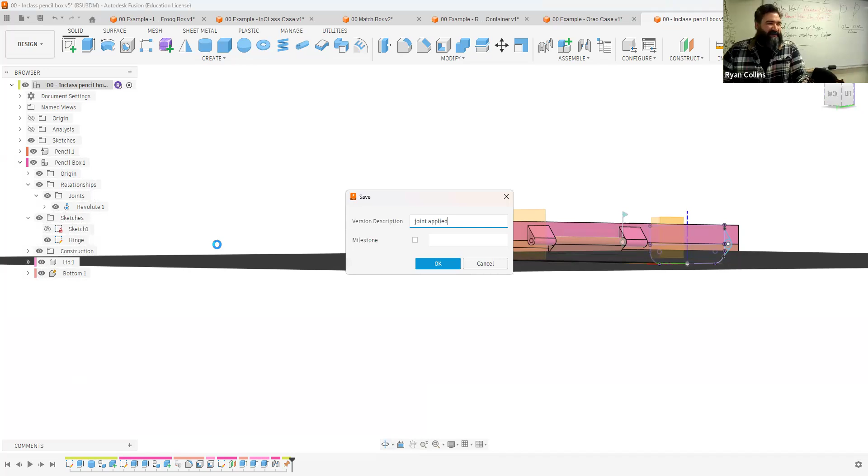So just as this last part here, I'm just gonna save that. I'm just gonna make a simple cylinder. So I'm gonna reactivate the whole project. Cylinder tool, and we're gonna start it right on this face. See if it'll let me create right there. Nope, but if I select on that plane, I'll be able to put it right in the middle.

Neat. What is the actual width of that stuff? 1.75 millimeters. And then I'm just gonna drag it the whole length. If you make it too far, that's all right. Technically, that wouldn't be ideal.

Not a big deal. So you see now, because I activated the whole project, it comes out green like that. That's just showing it's a different component.

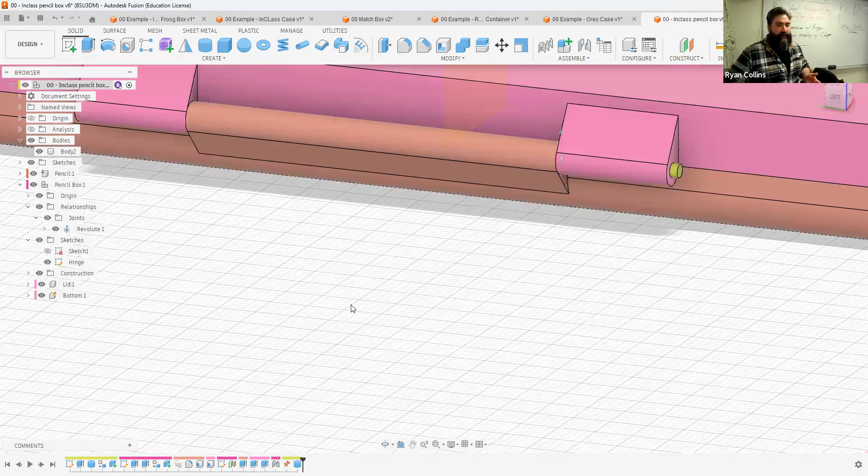That's it. So ideally, what would end up happening is we would feed a little bit of that filament wire through and just glue it, or even use a soldering iron and melt it on either end. Bam, you have a pin built in place.

And there you go. A really simple and mildly awkward pencil case.

So we're gonna add snaps and things like that to it, but we're gonna take a break for a minute and then we'll come back to it.

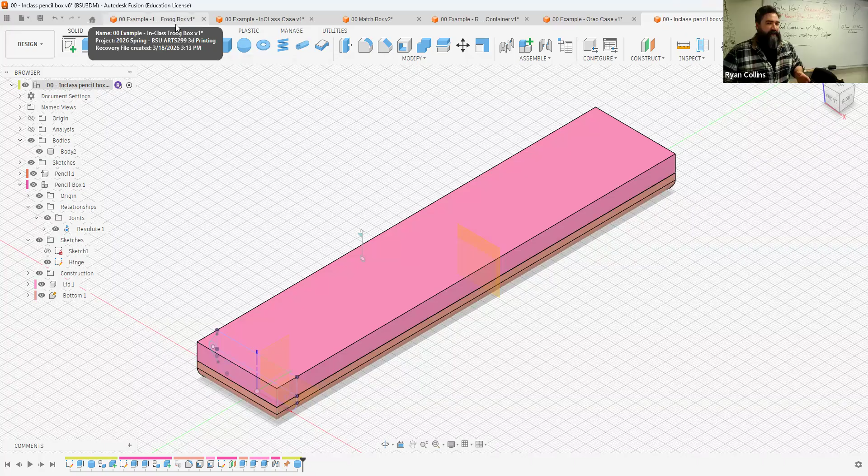So that is the outright basics of what we're gonna be doing, and that's really what I want to focus on tonight. If we can get there, great, but otherwise we'll wait till next class to create the actual, like, where's the example that has it?

There we are. The actual

Snappable feature in there that would work with actually snapping and closing.

So we'll see where we get to tonight, but for right now, there's our painfully simple case. We can always throw things like fillets and all kinds of fun onto that later.

You do you. But just remember that if you do throw too much on there, you can either get some ideally pretty cool features, or it's going to mess things up. And right now, that

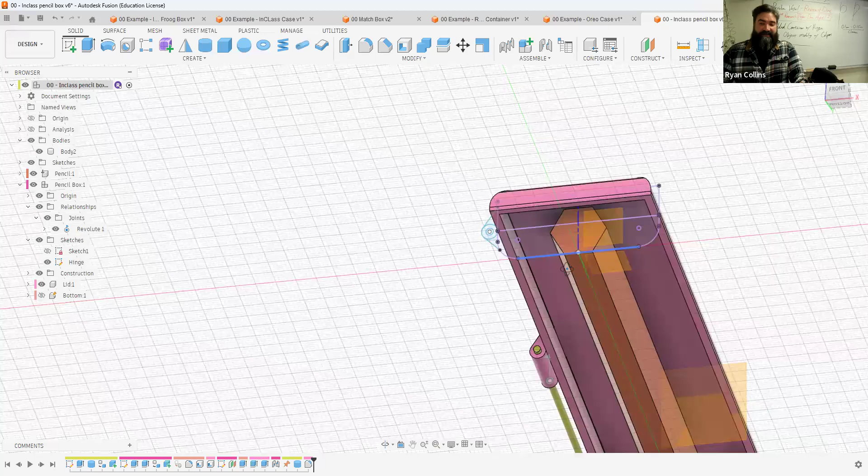is really messing that up because I just made a hole in that. So, if you're going to apply fillets, things like that, I would do that before you make your shell.

If at worst, crud, I meant to do that. Okay, control Z that, go back. Let's activate the lid component. Drag it back before we did the shell.

And that's where you could throw in that fillet. I don't know, wherever the heck that ended up being. Reapply all the things. But do know that then you're going to have to rework that hinge because that sketch no longer applies. But you can make those adjustments. It's a pretty simple fix just by adjusting your sketch. And so there's always going to be some kind of workaround when you make changes. So just know that.

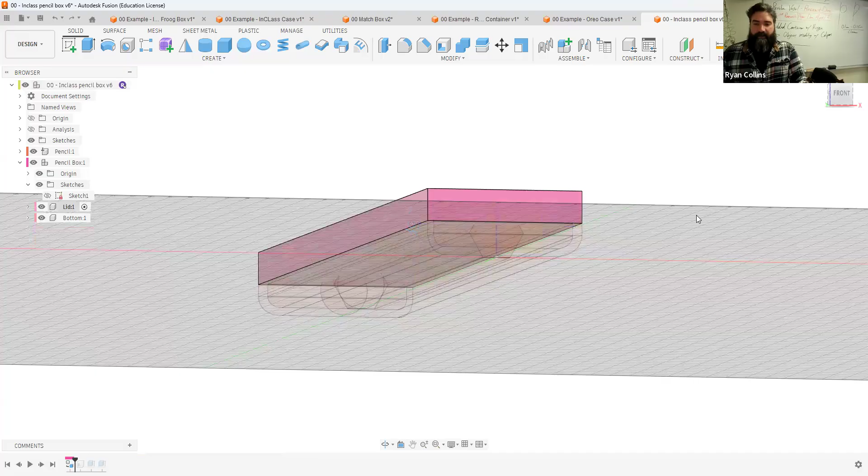There we go. Okay, let's take a break.

Okay, so we left with just this simple hinge onto this opening and closing box. Main thing is I wanted to show you just a couple of quick things as far as a latch. We're not going to get to latch today, but I do want to show you just some simple

like a thumb catch style. And this is simply like literally just a sketch and extrude as well.

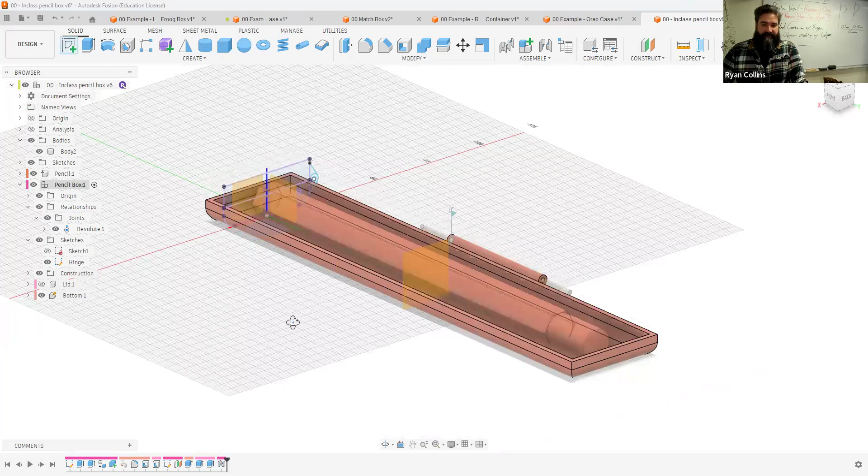So in the same kind of vein of how we made the hinge, this would simply be - let me activate the component that is the entire pencil box so it holds both the lid and bottom, and we'll start a new sketch. So we'll start a sketch, but instead of for the top, bottom, or anything like that, what I'd like to do, I'm going to highlight the lid, just for instance, and I'm going to use the top edge of the bottom as a starting point.

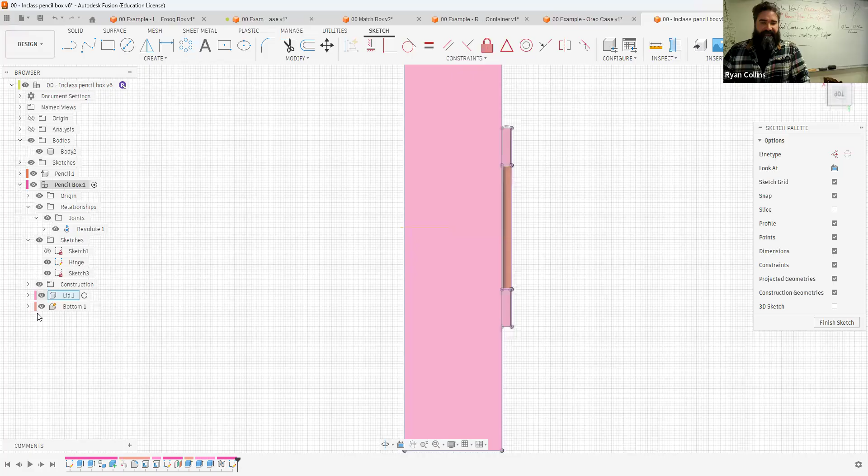So it just makes it easier to work from there. As far as the idea of a little thumb catch, all I'd be doing is making something around there. I'm going to use project, copy that plane there, and project that too. That way, if I hide that stuff, I have my outlines to work from.

The only reason I would do that is say, what if I wanted to keep this smack in the middle? I could just take a measurement, and where would be the center? Right about there. Draw something out there.

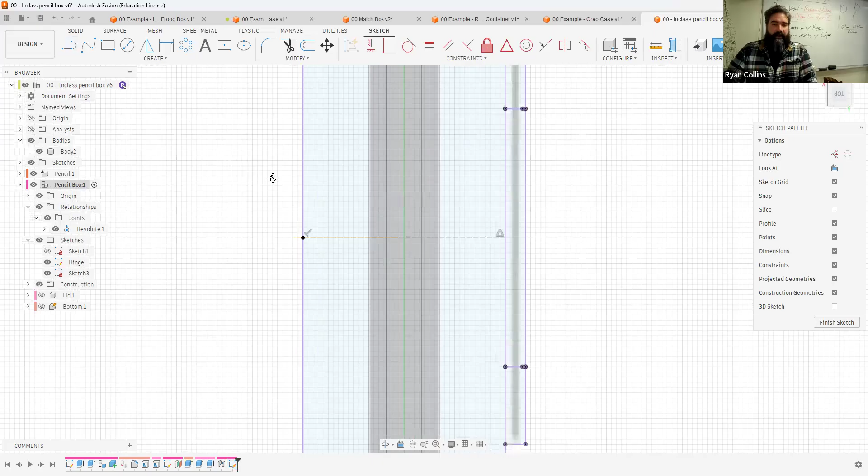I don't need that, but that's a good reference point. I'm going to turn that into a construction line, so I'd highlight the line I just drew, press X, little dotted line. There we are. I'm going to draw a circle on either side of that. I'll use 2 center point circles so I don't have to measure, let the program do the work because I'm lazy.

I'll start the center point there and go outward, 15, whatever. Then I'll repeat that. If you haven't learned yet, if you right click just somewhere, it will bring up a variety of simple tools, and up top will be the most recent tool you used. Just an easy way to speed things up.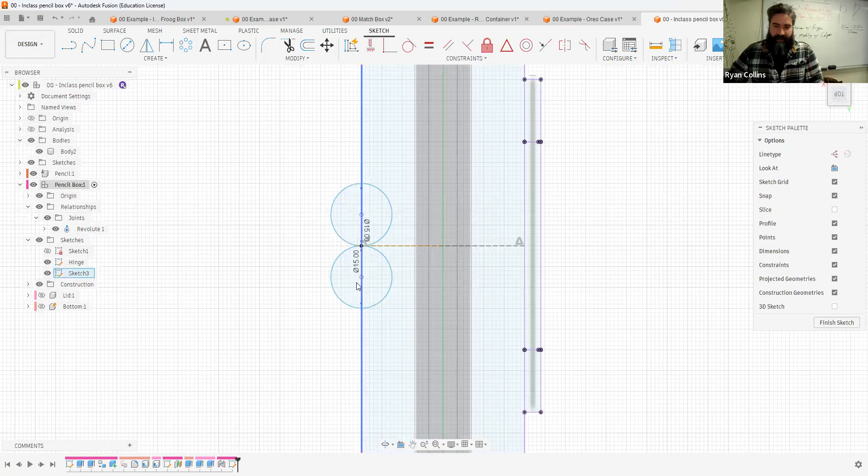Do the same, 15. No, not 415. Way too much, the biggest hinge ever. Just 15, please. Your hinge is bigger than the box itself, that doesn't work. Okay. So it just ends up with these two hemicircles, which doesn't really work as well. They should probably overlap, but whatever.

Finish sketch, okay. Unhide the lid, unhide the bottom. The reason I did that is, if I activate the lid component, I can extrude one of those, drag it up, and it automatically connects to the top. Let it join, good. Activate the bottom component, extrude the nub on the bottom, go down, and it automatically connects to the bottom. Join, okay. Activate the whole thing again, or both sides.

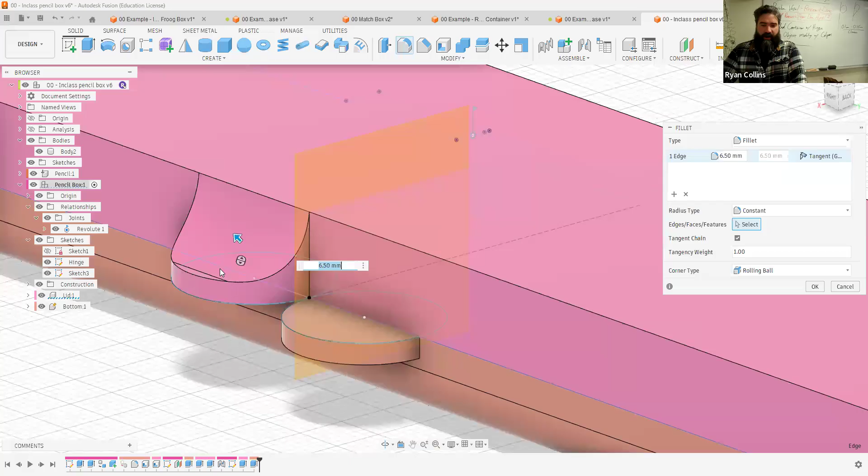Now what I could do is something like throw a fillet on that corner, drag it out, and you can end up with some pretty neat stuff. Obviously you can end up with just problematic stuff too, but play around with these things.

So maybe fillet on the corner first, and then repeat that fillet, and now use that. Now we can go up and out or something like that. I don't know, this is your project, you play around with it.

Do the same thing on the bottom. Repeat fillet. All right, I will put a little bit of a fillet on that one. Do it again. Neat, and there you go. So that would be like a simple little thumb catch. No big deal.

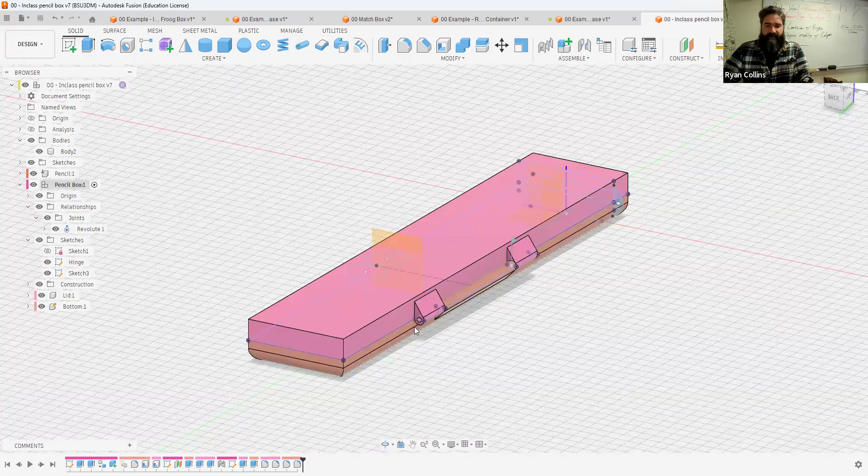Or thumb catch. The other thing I wanted to show y'all is we can play with two different types of hinges later, but this is a really simple one. We can always add nubs and things like that later. But the other thing I wanted to show you, because a few people had already asked about it, and I could already see they were making round containers: how do you put a hinge on a round container?

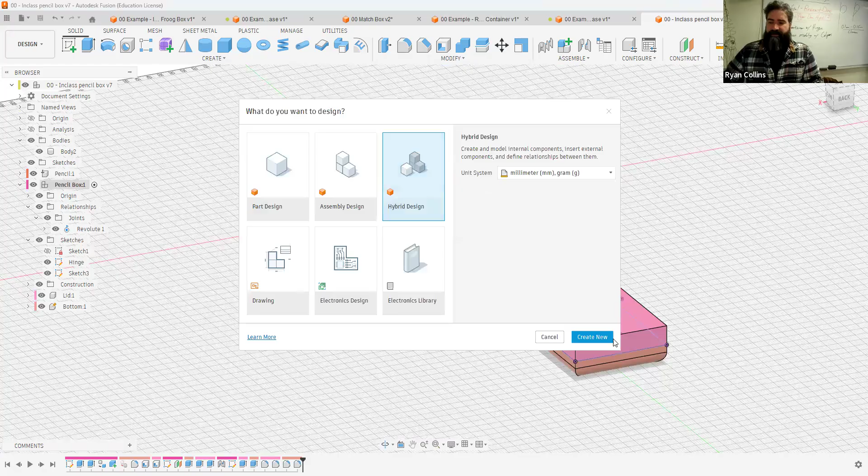Very simple, actually. Let me just start a new project, hybrid design. I'm going to kind of speed run these first two parts, don't really need too much, as in I'm going to make a cylinder. Sure, right about there, I don't know. We'll make it 45, and since I'm going downward, let's make it 20. I'm just making two parts.

Repeat the cylinder, same deal, 45, go up, I don't know, 10. I do not want that to join, I want that to be two separate bodies. Bam. All right, and then I will create a sketch perpendicular to that.

Project to copy those two bodies. 2-point circle, I'm doing the exact same thing here. 2-point circle, what did we say? That was like 5 before. Inside of that circle, I want a center point circle.

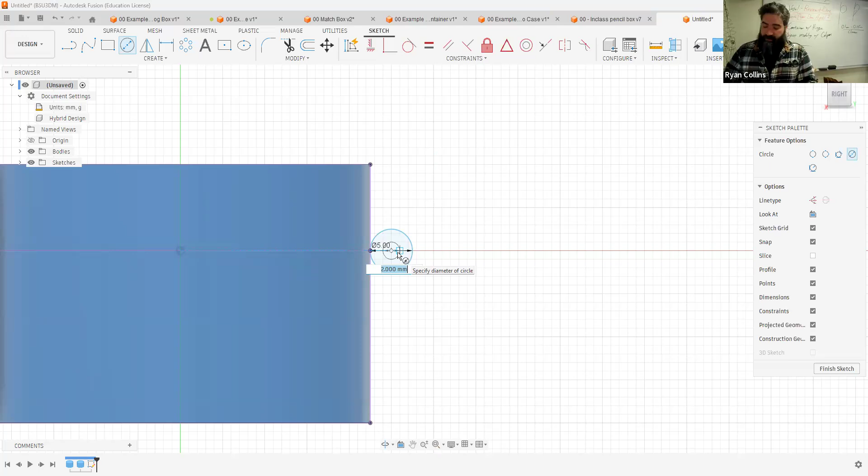And 1.75 for this, for the filament, plus 0.1 millimeter, so it would be 1.85. Just giving myself a little bit of space. Let's put a couple of triangles onto there so it would print easier. Whereabouts doesn't really matter, put a constraint just to even that out.

Completed sketches. Great, finished sketch. Now let's go ahead and make a couple of components to make this easier.

Make this easier on myself too. Body, whatever. Highlight the lid, new component, bam. Highlight the body, new component, bam.

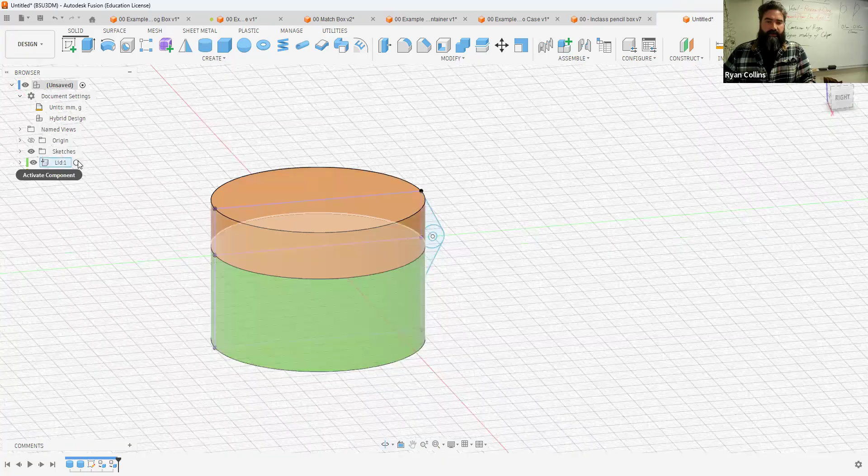All right, now let's say the bottom part, extrude that sketch, the bottom, and we want it to go symmetric both sides, some distance, 5, 10, not M5 squared, or whatever. There we are, and it automatically hid the lid.

So let's activate the lid component, extrude that sketch and that circle, starting instead at the object, that side of the plane. Repeat, sketch part, nope, object, selected that part, drag outward. What did I say, 4 or 5? Yep, there we go. Okay.

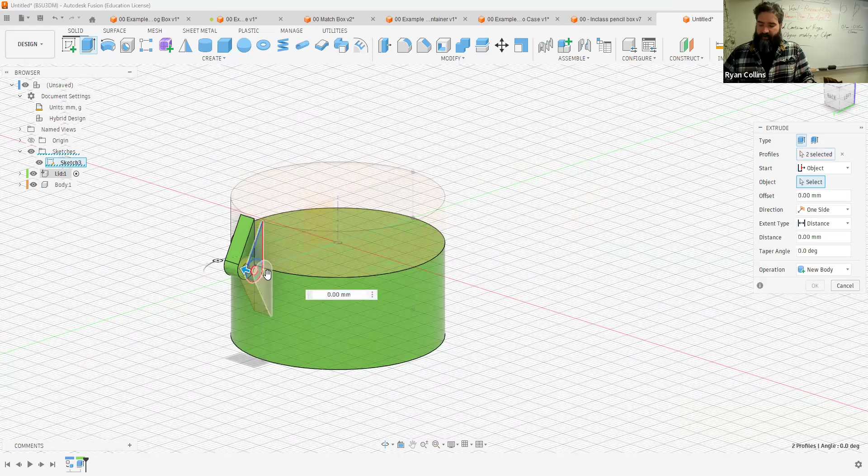So activate the whole project, and you can see that I did it backwards. So what happens when I speed run? I did this exactly backwards. All right, well I mixed that up. You did it backwards and we don't get the end one, you'd think, but all right.

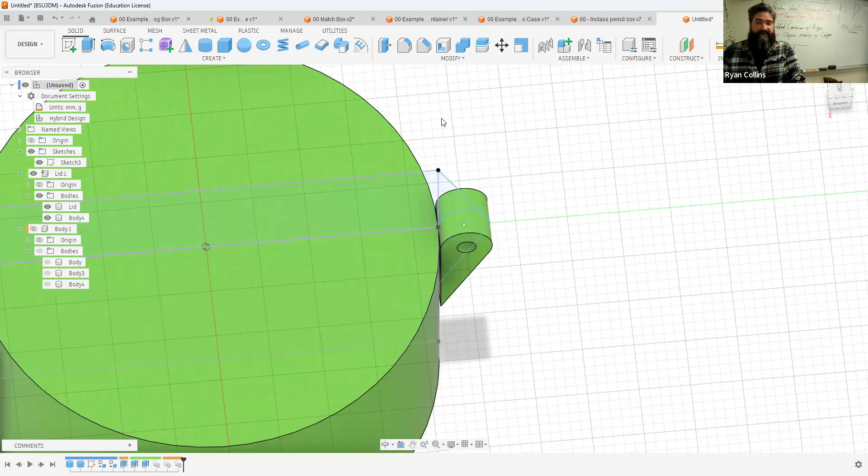Now the problem here is obviously going to be that looks the part from the side, but when I go upwards, there's a bit of a gap. Pretty easy fix. Now, one quick thing, I had not already hollowed this out. You should definitely apply the shell before you add these tabs. So again, I'll shell, I don't know, 2 millimeters.

Great, same thing. Activate the body. Did I label these backwards too? Yep, yes, see, that's what messed me up. So what happens when you go too fast? You mess things up. All right.

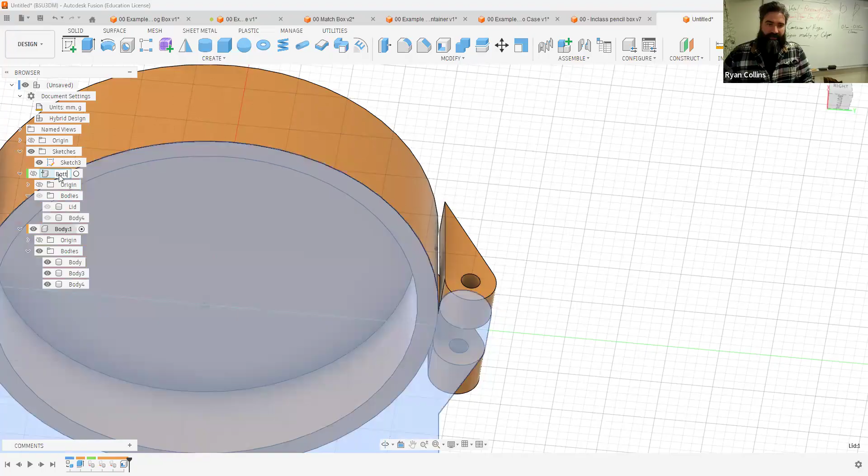Well, let's just relabel that. Okay, now I'm slightly less confused, which is really saying something. Slightly less confused, all right. So what I need to do is essentially, I just need to connect those.

One of the tools we haven't played with often enough, you should be able to, let's just hide. See, I've got it all labeled wrong too. Oh my God. There, lid, lid, lid, lid.

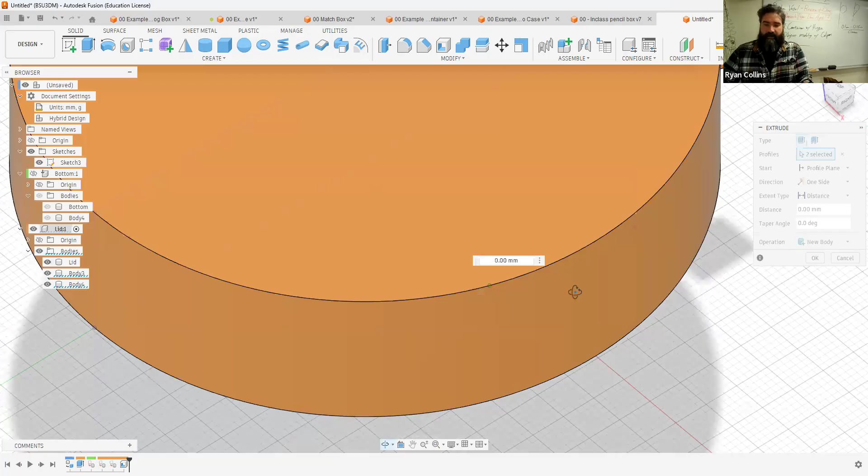What I should be able to do is I can just take these faces here and extrude these faces far enough forward to where they just take up the gap there. Now, I already had the shell applied, but if I keep extruding too far, it's going to go inside. So just be cautious you don't take it all the way through.

Operation, it's asking if I want to join them together. Yes, I do. Bam, now that's all one solid piece. Do the same for the bottom. Make sure to actually activate the bottom component.

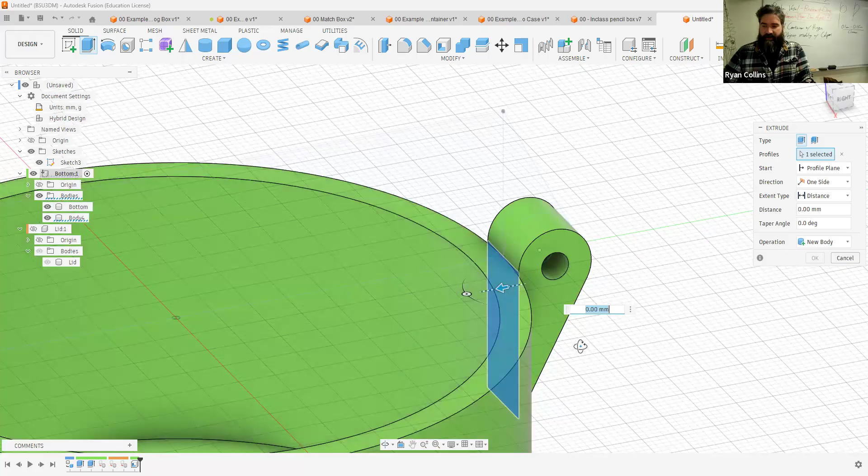Let's unmess this up, same deal. It gets hard to select there, so let's hide the bottom object for a minute. Extrude, and I can just select that actual face. Drag it inward a little bit so it connects. It's asking if I want to join. Yes, there we are, so same deal.

I did the exact same thing. The only problem is, aside from me getting some things backwards at first, if it's a round object of any type and you want to add the hinge, it's the exact same kind of hinge. You just need to add that one extra step of extruding those faces inward until it joins, or you can join it afterwards just so it intersects, but don't take it so far that it interferes.

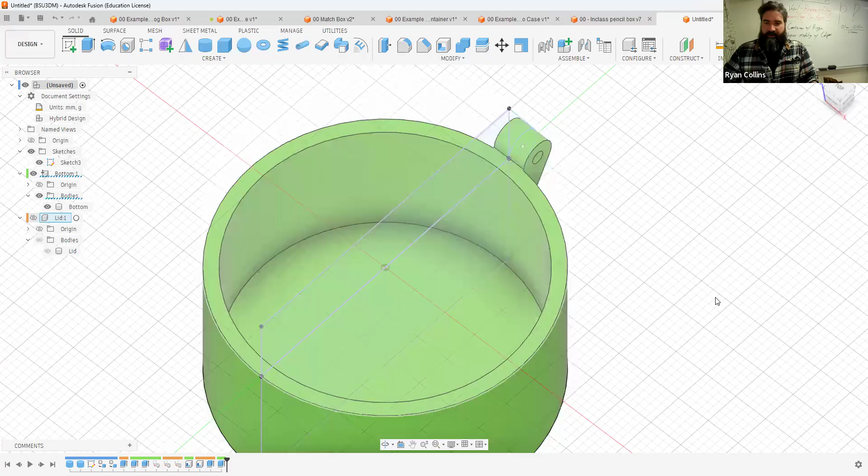The reason I said make sure to do the shell before you put this on, if you don't, it's going to try to shell around this tab as well, and it'll mess things up. So the shell works really well, but it works on everything. So if you just stagger, or rearrange your steps a little bit, you can make it work really easily for you. So that's pretty much it. And I can add that little tab and thing there.

So I wanted to spend the rest of the time working with people. These are the basics. Next class, when we get to this point, get to your finished, and then we'll work with whatever kind of things, and add like the latches and other elements. So we'll work with it, and that's where we'll go. Hopefully it works out for you and you don't get things backwards like I just did.